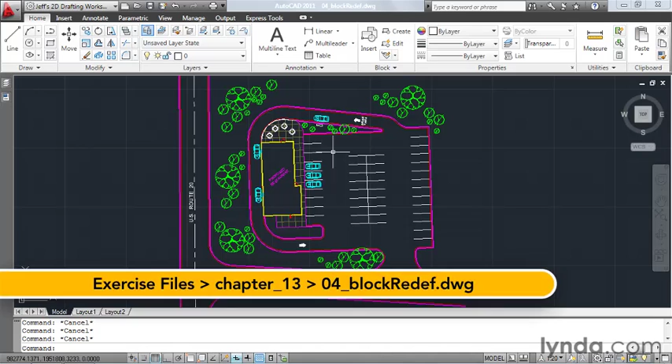Probably the most compelling reason to use blocks is that they can be redefined if necessary. By simply changing the geometry of one of the blocks, every other instance of that block will automatically update. In this lesson, we're going to learn how to redefine a block.

On my screen, I have a site plan for a proposed restaurant, and there are several blocks in this file. These trees were created using blocks, as were the cars, these tables, and these doors. In this example, we're going to focus on the trees.

Let's say I wanted to colorize this exhibit. Normally, we colorize a drawing by filling everything with various colors of solid fill hatch. Now, I'm sure you'd agree it would be very time-consuming if we had to hatch each of these trees individually. Fortunately, we don't have to do that.

Since these trees are blocks, I can modify the block definition, and all of the trees will update automatically. Let's add some color to these ornamental trees.

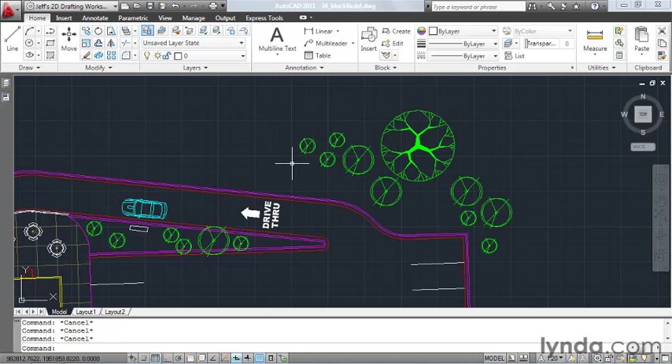To redefine a block, all you have to do is double-click on it. This brings up a dialog box where I can confirm the block that I want to modify. I'll click OK, and then AutoCAD brings up the block editor. This allows me to jump into the block itself and get access to the individual components.

Notice the new block editor tab and the additional tools. Also notice the model space background color has changed. This is so that I don't forget that I'm in the block editor.

Now the block editor can do a lot of things. We can add special grips to modify the block shape. We can apply parametric constraints. We can also create multiple visibility states. For right now, we're just going to make some simple changes to the geometry.

I'd like to start by erasing some of this line work. So I'm going to set the Home tab current, and I'll launch the Erase command. I'll select this geometry and this extra circle.

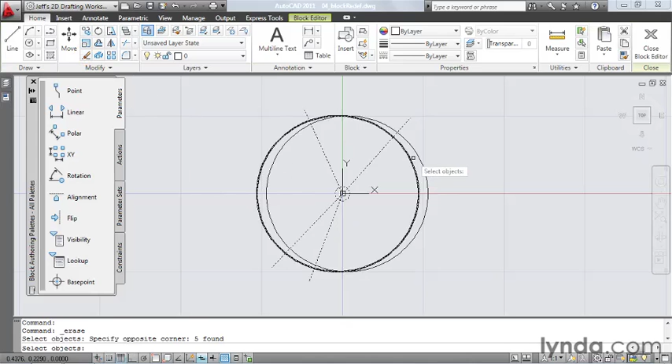Now I'll hatch this remaining shape. To do that, I'll launch the Hatch command, and then I'll click the Pattern Flyout. And you know what? Let's kill two birds with one stone. Let's take a look at the Gradient Fill hatch as well.

I'm going to select Gradient Spherical, and I can see the colors of my gradient right here. I'm going to click the blue flyout, and I'll change this to green. Then I'll come down and click to turn off the centered toggle.

And when I do, watch this preview. Notice my second gradient color is no longer centered, and if I wanted to, I could further refine this by dragging the angle slider. I'm going to set this back the way it was. This will give me the appearance of a light source being cast down from above.

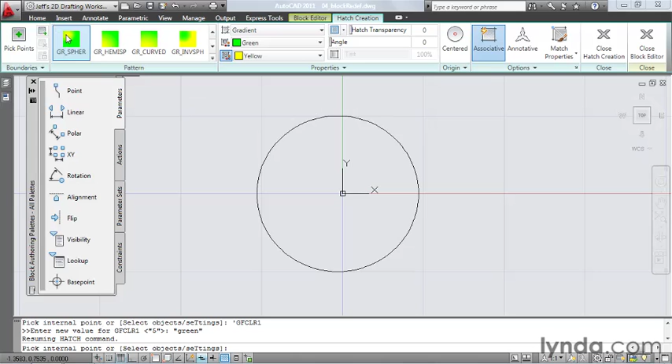Since I'm happy with my settings, I'm going to place my cursor inside the shape, and I'll click, and then I'll press the Enter key to accept the hatch.

This is exactly how I want my revised block to look, so I'm going to go back to the block editor. I'll come down and click Close, and then I'll click to save my changes. Notice that each instance of that block has been updated in the drawing.

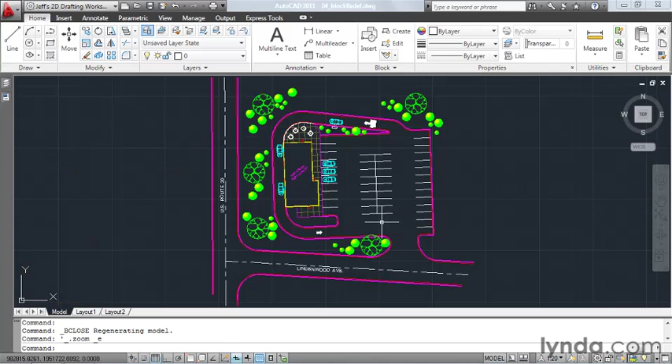Redefining a block is one of the biggest time savers in AutoCAD. If you have the foresight to create blocks for your repeated geometry, making global changes later can be done in seconds instead of hours.